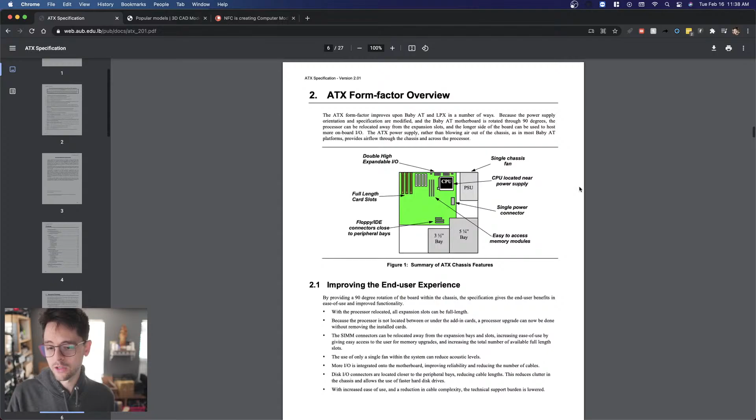If you're wondering how you position parts or make a particular part, there could be a standard for it, so just do a quick Google. I just did a quick Google for this one. I knew it existed before, but there are lots of different standards.

Intel, for example, has tons and tons of standards. They have the ThinMini ITX standard, and they'll have great documentation on how you're supposed to design parts, components, and cases for their ThinMini ITX. Same for their NUC—they have tons of great documentation and drawings. They even have 3D models of the NUC boards and components to help system integrators. So just keep that in mind.

A lot of engineers, a lot of companies supply you with the tools that you need to make stuff because they want you to buy stuff and make stuff and sell their product.

Here is GrabCAD. It's one of many different kinds of file repositories where people just kind of doodle and upload their files. They have a lot of computer parts on this site that you can download and use. However, I can't stress enough that you should never, ever rely on these models if you're going to go get your stuff made, particularly in a manufacturing scenario, because a lot of the models are wrong. The holes won't line up correctly, and you'll end up wasting a ton of money on a prototype. But it's great for just getting the rough dimensions of parts out there.

And getting started. Oops, 120—that's not going to work.

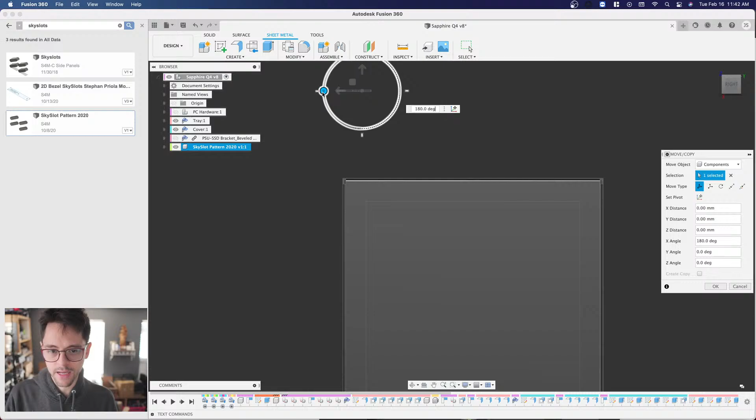I actually want my SkySlots going forward to the front of the case, so I'm going to rotate this around. SkySlots is just the trademarked name. They are trademarked of the vent pattern that NFC has developed.

With a lot of resources going into them, but they are extremely cost efficient to laser cut, which is very important because if you add a lot of different little cuts for vents and stuff, it can really add up - your cost of the case will explode. Secondly, it's an extremely strong pattern. Once you get the cutouts, you can have a lot of area for flow, but your panel's not going to warp or bend. And finally, it has excellent EMI capabilities for containing EMI, given the huge cutouts.

So depending on what hardware you're running, it may not be enough for you, but we were able to use it to pass FCC testing on several cases using SkySlots. And finally, they are VESA compatible when spread out in an array. So those are all the features of SkySlots, and of course you can use them for your own projects, for your personal use, absolutely for free. Or if you're an engineer at your company and you just need something made for your company, inside your company, that's also totally free. Alright, this is about where I want it to look.

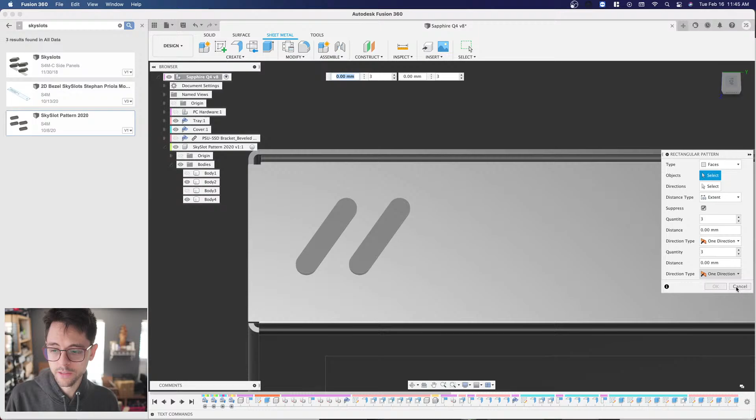Before I do that, actually, I'm going to make this easier on myself. Instead of doing a projection, I'm going to see how thick these are - 2 millimeters. I'm going to make these 2 more millimeters.

I've selected 2 bodies from my rectangular pattern. I got to click my direction, which is right here. And now I'm going to just pull it all the way across until it looks about right where I want it. I'm going to kind of match the top and the bottom, and move them all a little bit when I'm done. I think this looks fine, so I'm going to say that's fine.

But what I want to do is have the pattern match the spacing of the SkySlots, because that matters, right? Especially if I'm claiming that's VESA compatible, it has to keep that same pattern. So what I'm going to do here is just start typing in numbers till I get close.

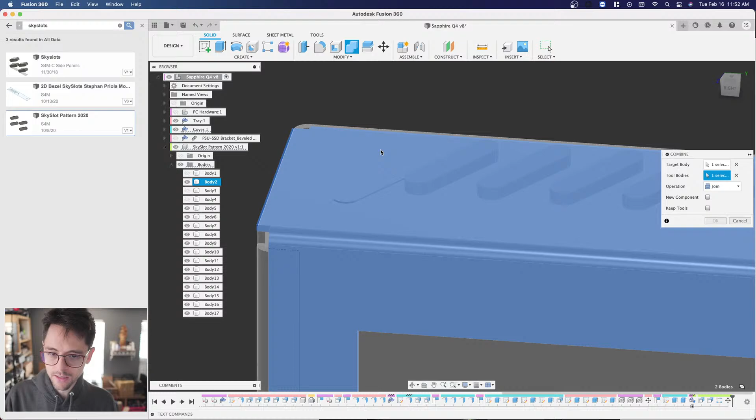Click modify, hit combine. I'm going to select the target body, which is my panel, and select the tool body, which is my SkySlot, and click cut. I'm using that tool body to cut into my case. This is really, really useful for making complex cuts, like if you have a sphere and a cube, you can maneuver the sphere on the edges and then subtract that sphere from the cube.

Really powerful tool. But I'm actually not going to do it this way because I want to cut through both sides evenly. So I'm going to hit cancel, go back a couple steps right here, and I'm actually going to press-pull intersect through my entire case. I think that's going to be the best method of doing this. So I'm going to hide this really quickly so I can select them.

It's so weird how Fusion operates as well, because this is a fine number, but if you have a lot of surfaces or faces that you're selecting, it can start to really bog down, and each selection takes like 30 seconds to update to the next one. It's horrible sometimes. Hit Q, which is my press pull.

I'm going to go back to my cover and unhide it, and now I'm going to just pull all the way through. And I'm going to click Modify Existing Feature. And it unselected it for me, which is not what I wanted it to do.

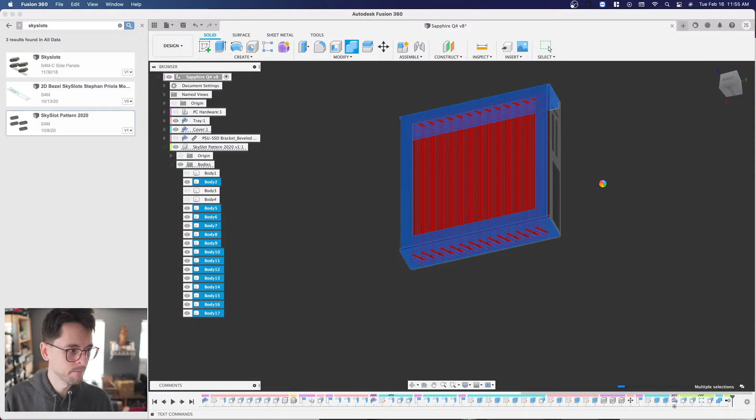Matthew asked a great question, and he asked why I use bodies rather than a sketch for cutout features. When I'm designing a computer case for production, generally it's better to do things all in the sketch, because the manufacturers aren't really going to look at the 3D so much as they are going to look at the 2D CAD, and that's kind of easier to share and go back and make changes to. However, I find that process to be very tedious and very slow, and for quickly designing a computer case, I think this process works totally fine.

There are some things that I do sketches for, which I'm probably going to end up doing later in this video, but I just wanted to use it the bodies way.

Also, I want to add that Fusion is really slow when it comes to working with sketches, because Fusion wants to keep in memory, I guess - I don't really know, I'm not going to act like I know - but Fusion is constantly recognizing the fact that you have something in a sketch and it's pulling from that sketch, so it works really, really slow. Whereas if you do it with bodies, it's like you cut out the body and then it's fine, there's a 3D model sitting in front of me, so the performance is actually pretty good.

Now, that's not really a good reason if you're designing a case professionally, but for my purposes here, I'd prefer the extra performance for these simple operations. Eric, NFC Eric, who is the CAD master, he only makes things in sketches, one part at a time. But you can't teach an old dog new tricks, so here we are.

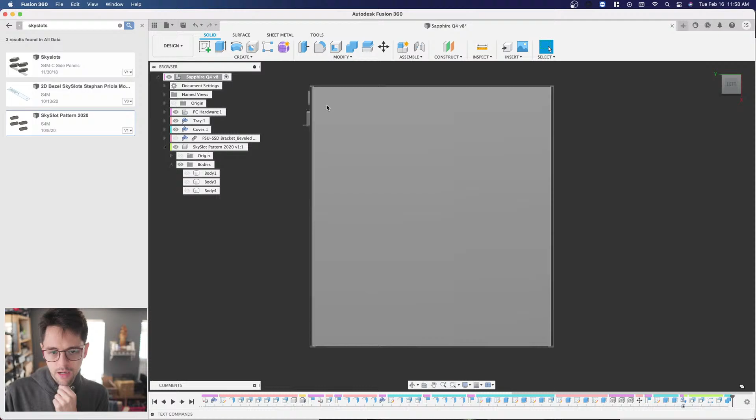I could put an array of sky slots to see the fans in the back, and that could actually look pretty cool. It may be what I want to do, or maybe I want to make a full-fledged window and do some kind of border around it. Maybe like cut out of MDF or something, and a spacer that pushes it more towards the graphics card, so it kind of looks thicker and beefier. Let's try that first. I don't know if that's what I want to do.

So what I'm going to do now, and this is also probably bad practice, but this is just how I do it - so if you're an expert, feel free to ignore - but at this point I'm going to duplicate my cover and my tray. And I'm going to start experimenting now. I don't want to mess up the old one.

I can always go back on the old one, but I find it's better to duplicate it and just delete it if I absolutely hate it. Or if I kind of liked it and wanted to see what it looked like versus the old one, then I can just hide it.

One more thing too, in case we missed this in the previous stream, my process for designing a case is I have this messy table approach where I put everything into my document to start with. I experiment, I move stuff around, and Fusion's going to get really bogged down because that's not how Fusion wants to operate. But once I have everything how I want it, I'll start exporting the pieces one at a time into separate folders, then I'll do an assembly file and use joints to put everything together, and I'll have a very high performance 3D model that I know aligns properly. But this is kind of my messy sketch table.

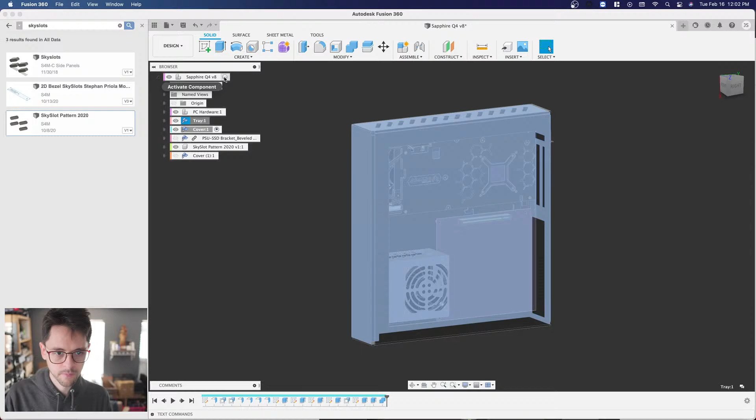So I'm going to hide my original tray and cover, and now I just have my new tray and cover. Hide the cover. I'm going to reduce the opacity of my tray. And I'm going to make a cutout on my back.

I'm going to use a sketch for this, because I think this is faster than using a new body. I don't want to go over the entire graphics card, because then when you're standing over it, to the side, or underneath it, there'll be a gap in the case, and that will look bad. So I'm actually going to make it less wide than I think it needs to be, so when you're standing over it, below it, or beside it, you actually see the whole card, or most of the whole card. It'll look cooler this way.

So I'm going to make this... actually, I have an idea. I'm going to use the cover as a guide for back to front. And I'll just make it shorter. I think that's right there, right? Yeah.

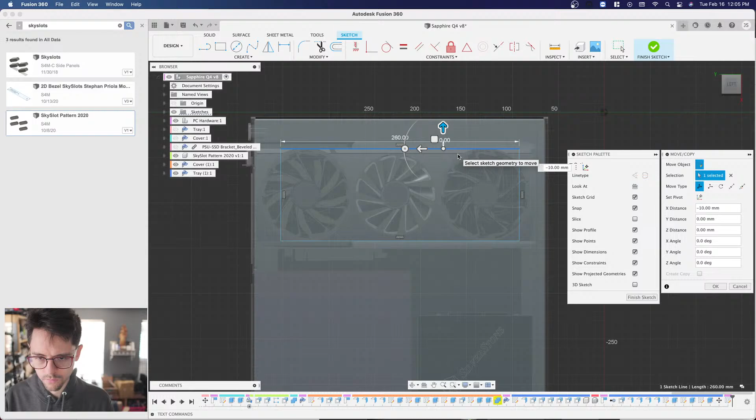Now that I have this in place, I'm trying to think if I like it or not. Of course, I'd round the edges. I'm going to put a window over it. But I feel like if I go expose the card more on this side, then I'll get less case, which I don't know if I really want to do. So I don't really know if I like that so much.

So I might end up using SkySlots and go with the Sapphire RGB fans that plug into this graphics card and do some LED lighting to illuminate the card from that side. I could put some circular cutouts for the fans and then use spacers. I could try that too. That could also look pretty okay. Could also look really weird.

Let's see what that looks like. I have to confirm on my graphics card that the fan hub centers are going to be the same, which I think that they are. It's going to be 60 millimeters for the first fan hub.

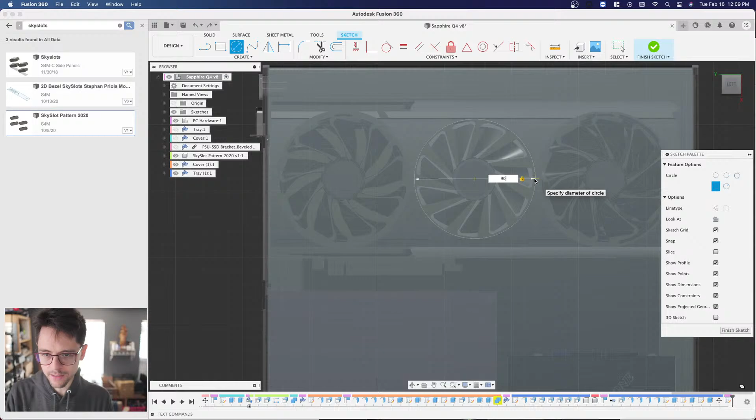Yeah, I think I'll go a little bit over in that case. I'll do 88 for this one, maybe 80, maybe 90. That doesn't give me a lot of room for the other one. I'll go 88.

95. I want to move this one so it's in the same plane. I want to move a copy. Hit create copy.

This is going to show a lot of case and not a lot of card now. It's kind of the catch-22.

But it could look pretty cool though if we do get the Sapphire RGB fans.

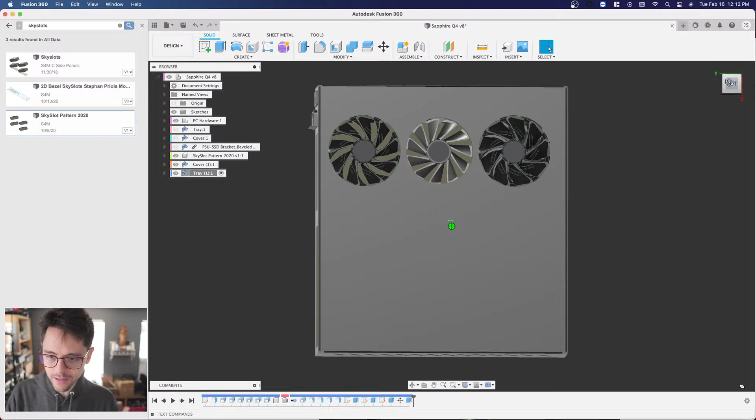Now with it full opacity, I see that the case is kind of a little front heavy now because the card has to sit this far back. Do I hate it? A little bit. I think I can get away with bringing the front in a little bit more.

So I'm going to kind of cheat and do this because I think I can get the card installed because of the really cool 3D printable bracket that's going to hold the card in, which you can see in the previous video. So I think I have room to play with here.

So I'm going to come down here. It looks like I have about 10 millimeters to safely get the card in. So let's see what that looks like. Again, I have the tray selected, which is what I want. Hit move. And I'm going to come back in 10 millimeters.

Which I can fit, but boy, is that tight. That means I'll have to install the card by this view right here, sliding it in that way. That'll be kind of difficult to do, so I don't want to go that far. So I'm just going to go 5 millimeters. Oops, that's 15.

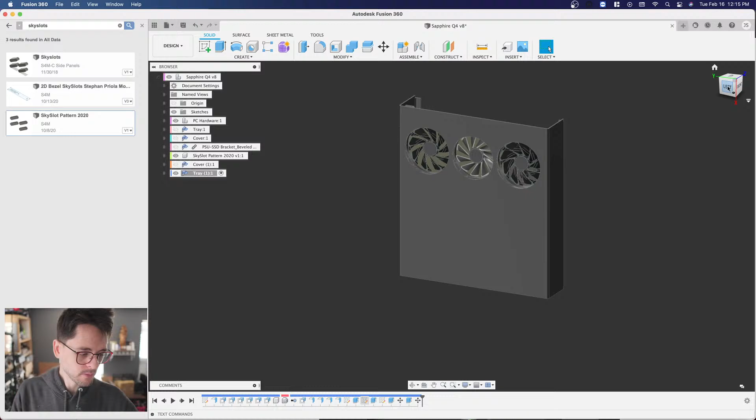Jesse, you're more than welcome. I'm sorry that my process and my thinking is so slow and unprofessional, but I figured I might as well show it anyway, so maybe it can help somebody. Because if I can do it, anybody can do it, and that is the truth.

I don't know, what do you guys think? Do you think that the cutouts of the fan are going to work? We put some trim over it. It's just a little bit too gamery.

I do want it to be a little bit gamery because this is a case for Sapphire to show off their stuff, it's going to be a custom mod for them. So it can be a little bit less tasteful, I guess is the term. Usually when you're making a case for everybody, you want to tone everything down and make it minimalistic so it appeals to everybody, but it can be a little bit wild and crazy for this. I just don't want it to be ugly.

Okay, for the motherboard, do I want to make any more cutouts? Make some SkySlots for everything? I think I could. I think I should add at least the mounting points for the motherboard though, maybe the power supply, so I know that if I'm making SkySlots, it's going to look okay.

But then again, maybe what I'll do instead is a cutout of the Nitro guy, really big. I could do a decal of the Nitro guy, that would kind of look neat. Or maybe I could do a cutout and then put a piece of acrylic behind it, as long as it's going to look good from the top, because that is a consideration that I want to make.

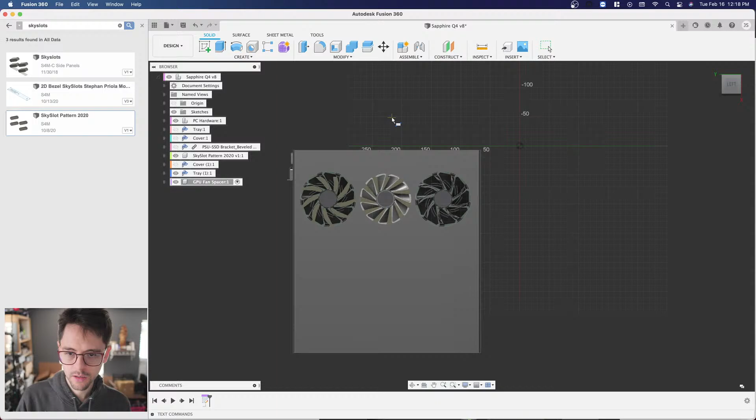And I'm going to create just a box. If I click the planar face, it's probably going to want to merge with it, so I'm not going to do that. I'm going to click outside of my model and just move it. All right, I've clicked outside my model, now I think I can place it inside right here, so here to there. I think that's correct. Yep, cool.

So we can just start adjusting my box. I want to go this way, I want to mate up, 10 millimeter, that's about right. We want to make sure that it covers my fans in the front. This is on the bottom flange, so we have no problem going all the way to that edge. Now I want to make sure that it's somewhat centered on the graphics card.

I actually kind of like it a little bit below. We'll come up just above it because this is 110. Let's make it 115.

Okay, now I don't usually do appearances this early on, but instead of changing the opacity, I know I want to make it out of acrylic. So I'm going to go down to plastic, and down to transparent, and... that's kind of cool. I do have orange, but I'm not going to use orange. I'm going to probably use a blue or something, maybe a dark gray, something that kind of catches.

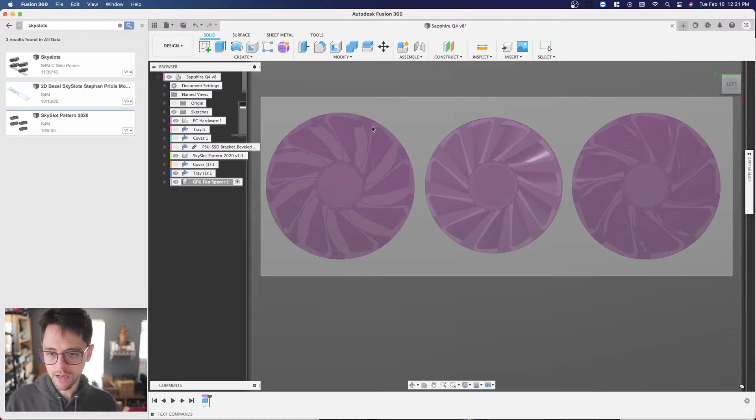Okay, I can do a couple things here. I can leave a slight ring, but I'm already up against my upper parameters with the sheet metal, so I don't think I'll do that. Maybe it's the slightest possible ring, so it will catch the lighting. Maybe I'll do a chamfer operation with the CNC instead of laser cutting this out. Let's try that, I think that will look kind of cool.

So I'm going to use a hole feature this time instead of a sketch. The reason is I can click my acrylic part anywhere I want to, as long as it's the part I'm cutting into. I'm going to choose simple hole, right here, so we don't have to specify any bolts or anything like that. We're not drilling into it like a drill, it's just going to be flat - we're making a standard flat hole. And we know first of all we want to center it. This is what's cool about the hole feature - we can click any circle reference that we want. Boom, and the hole now centers this cut that we're making.

Really easy, really simple. It's so funny guys, I used Fusion for like 2 years before I discovered the hole feature. I was making sketches with holes and then going and extruding them all by hand. I didn't know you could use the hole feature, which is absolutely epic. You can choose what screw sizes you want too - I'll show you more later, that's going to be important. Really, really awesome tool. So the diameter, we know this is going to be just 10 millimeters thick, 10 millimeters deep rather, the cut.

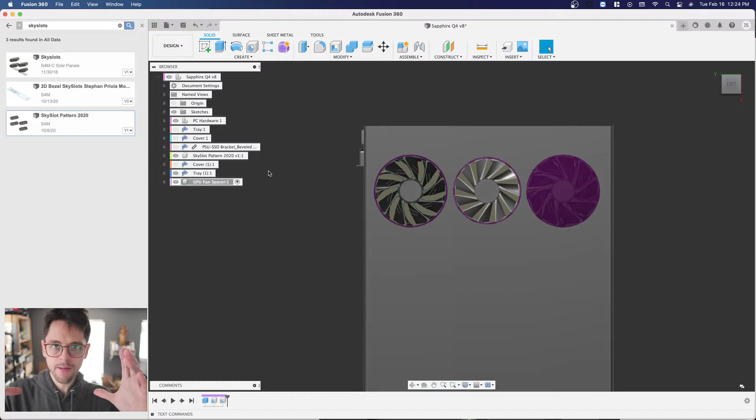Now, something to know about fans, which I'm sure you guys already know, most of the power of a fan, as far as how much air it can push, the pressure, is at the very edges of the blades. So we want to cover that just a little bit, but we still want to leave the edges of the blades open to the air. Let me see if I can rephrase this - all the power of this fan is going to be in the edges, pushing down to the GPU's fins. So the air is going to get sucked in towards the middle, but slung out down towards the edge of the fan. If this was reversed on the other side, this would be a horrible design, because this little ring that we have here would be blocking most of the fan's ability to generate pressure. But since we're sucking in air past it, and it's going to be pushed down into the fins, this would be okay. I'm really sorry that I'm a bad teacher, and even worse at explaining things, but hopefully that makes a little bit of sense.

Sorry, I got my... oh, that's the depth. I definitely don't want that.

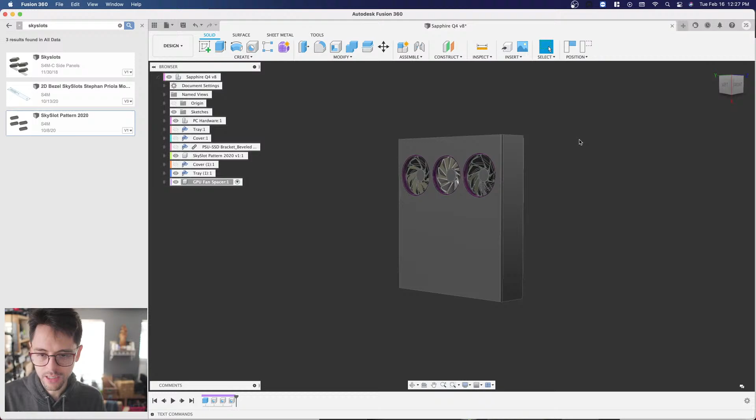Now you can see that we have the outline, and that's because in every 3D application I've ever used, if you have two 3D models touching each other exactly, it will cause weird rendering errors. So the solution is simply to move it out a teeny tiny little bit. We're actually going to make this 0.5. So our rendering error is gone, and more importantly, when we actually go to render this, it's not going to make a weird flickering error.

All right, going back to design. Blake asks, how do I like Fusion?

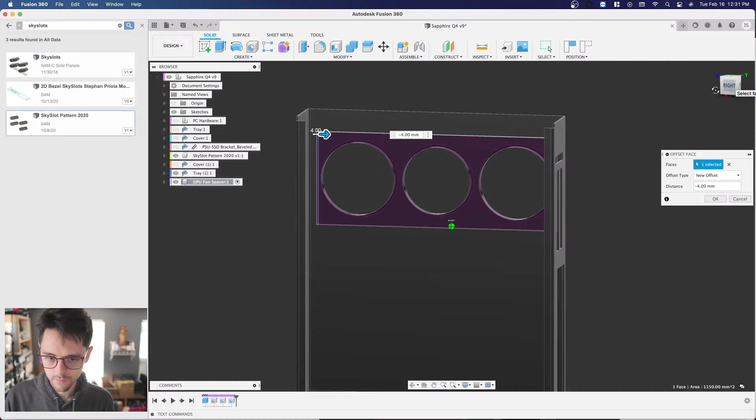It's about right. The only thing is if I look at it from this angle, I do want it a little bit deeper. As long as it's about 4 millimeters though, I'm going to be happy with it. Oops, sorry, I just bumped the microphone with my hair.

T's asking how I add a model to a project - I'm sure I'll be doing that quite soon. I've done it many times so far, and I don't think I'm over with that. Kenneth asks if this will be recorded later. Yeah, it will be, it's recording right now I think, but it's definitely going to be saved on YouTube. Hopefully somebody will also come back and volunteer to chop this down to size.

Protato has pretty good facts right there - you can cut aluminum with a laser. In fact, SendCutSend has fiber lasers, and I will be cutting this out of aluminum with a fiber laser. But my laser, my metal cutting laser, I can't cut aluminum - I can only cut steel.

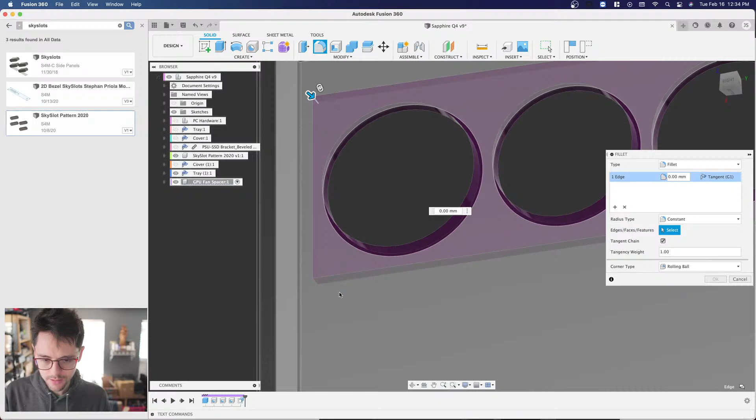Now, something I see people do all the time when they're designing computer cases — and this includes professional computer cases like from Thermaltake or Silverstone or whatever, and a lot of Chinese cases — is that they don't stick with a look for their fillets. They just use different sizes everywhere. You can have them different sizes as long as they look similar, but you want to keep it looking similar throughout the case. You want your case to have a certain aesthetic, and it looks bad if some of your fillets look like this and some look like that.

I want a little bit smoother, rounder for the look of this computer case. Not too much, I'm going to keep this at 15. I'm going to try to keep this look for any rounded parts I do throughout the case.

If you want to know what bugs me — when I look at a computer case and I see different kinds of ventilation cutouts, that's ugly to me, that's really ugly to me. Or I see them using different kinds of bins throughout the case, that's ugly to me too.

Now I'm going to chamfer these. I've decided I'm going to do this on the CNC, plus the CNC will give a much better edge than the laser — it will make a nice smooth edge that I can polish out really well. We're going to drag it a little bit. Oh, I don't want to fillet it, I actually want an actual real life chamfer. Two millimeters. I think that is going to look really slick on the CNC.

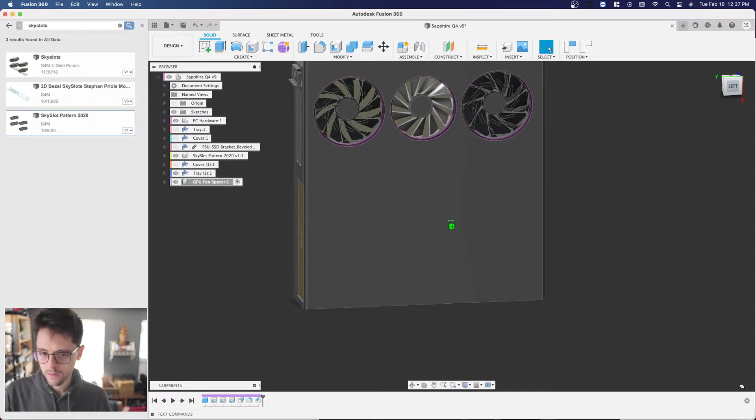The question is, how will I know where to put those particular holes? I could, on the CNC, if I was going to make this on CNC, mark those holes really easily so I'd know exactly where to place my motherboard. I think in this particular instance it's going to be better looking and better served if I do some kind of trim plate on this side, either out of carbon fiber or an opaque acrylic, maybe a piece of aluminum. That way I can just cover up my holes.

It adds the cost of the computer case, but I'm not worried about that because it's a mod. So let's put my holes in right now either way for the motherboard, and then I can worry about covering them up or deleting them later if I go a different route.

So to make those holes for the motherboard, I'm going to press H for my hole button, capture the position, click my tray. Definitely don't want that this big. Because I'm actually doing this for a screw, I'm going to click clearance.

And because I'm going to make it countersunk, I'm definitely going to click the countersunk button as well. Well, actually, I'm going to show you countersunk, but I'm not going to do it for making this computer case, and I'll tell you why in a second. And then for the drill point, we want it flat. The depth, obviously we want the thickness of the material, which is 2.

And we're going to choose an M3 screw. And now Fusion knows exactly what the diameter of this screw hole needs to be for an M3 screw, a clearance M3 screw.

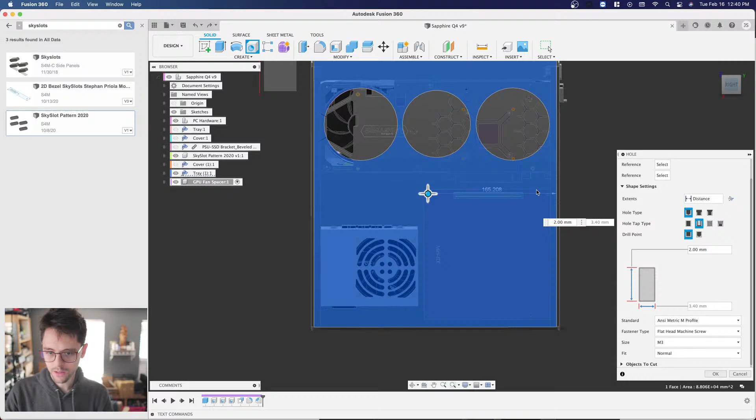All right, now I have my hole, and this is why I love the hole feature so much in Fusion. I don't have to drag it or position it or move it around. All I have to do is click where I want it to be centered, and Fusion automatically will put it centered on the hole that I clicked. Boom, so now I have a motherboard hole exactly where it needs to be.

And I'm going to do the same thing a couple more times. Something else that's kind of cool, if you do a sketch with all your holes in it, you can click the hole tool, and then click one button on the hole tool referencing your sketch, and it will automatically put holes in every similar sized sketch object, if that makes sense. Very handy. You don't have to click every single hole on your sketch, you just have to click one.

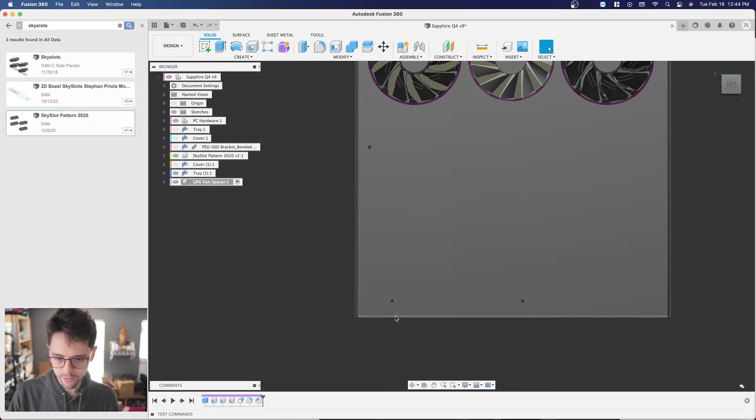But I have a problem, and that's I can't really make a cover to cover these two bottom motherboard screws up, because that's going to cover where my other screws are going to bolt. It will look kind of weird, I think. So I think the way to tackle this will be with a pattern of some kind, maybe SkySlots, to make my brain feel like those holes really aren't there.

I don't want to put SkySlots behind the power supply though, that would be dumb. And I don't want to put them... I could put them behind the motherboard right here. Give us kind of access to the back in case we wanted to put like another SSD there later or something.

I think I have to add my screw holes to my clamshell design now in order to get the look I'm going for. I usually like to wait as long as possible before adding holes, but I'm going to have to do that. And the reason I like to wait is I don't know how I want this to look yet, right? And I might end up scrapping this look for another.

I don't have to go through all the work of adding the holes all over again. But it's important at this point, at least, to do these ones so I can see how it's going to go together. So let's do that.

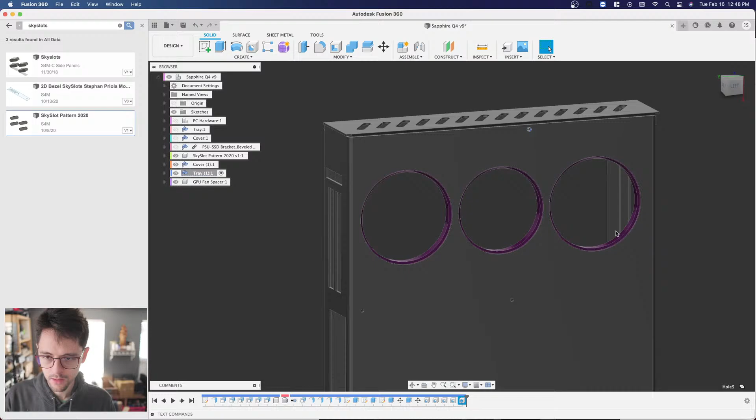155. So now it's mostly centered. 5 and 155.

All right, to the other ones. And we'll say 20. What's 20 look like? And here is 5. That's good. I don't want it totally on the edge. I'm fine with that look. And it's going to hold fine right there, so functional and cosmetic.

I must have selected the wrong part.

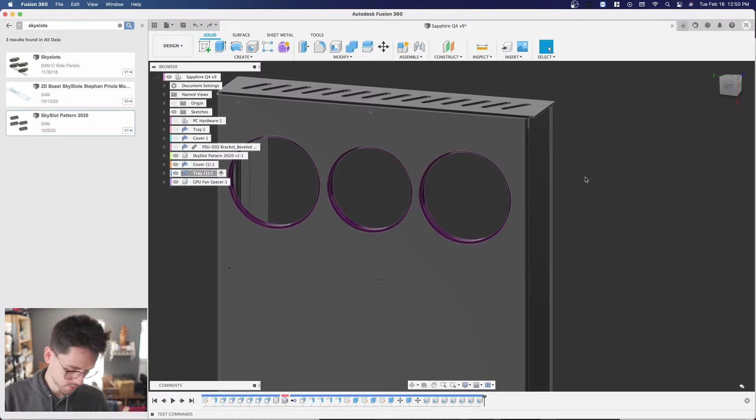I don't know why it's doing that. It's not even giving me an error. Can I do it anywhere else? Very strange.

And we definitely do want to know exactly where it is, so I can't just freehand it because we have to make mating holes.

Might have to restart Fusion. Okay, I don't know why it decided it wanted to start working, but I'm fine with that. And I'm going to do the bottom now.

So now I can see where my holes are going to be. And again, I'm not happy with the fact that we have the motherboard holes. The other ones are fine, but the motherboard holes just look kind of bad. So, is it a big deal? The biggest deal in the world? No, but we can do a little bit better.

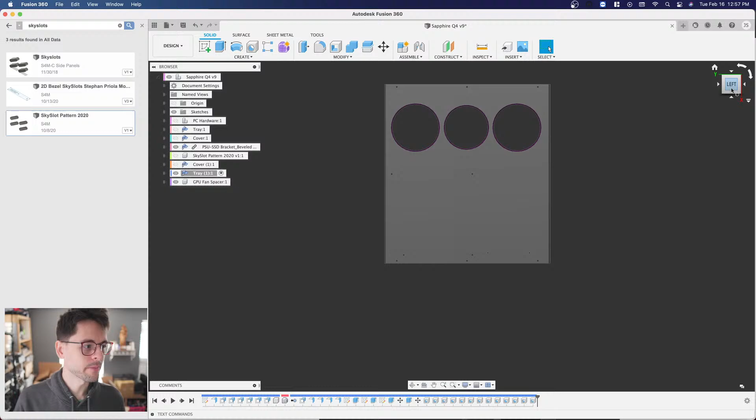Nazim, this is a computer case that I'm making, a Mini ITX computer case, and I'm showing people my process of start to finish, making it and getting it made.

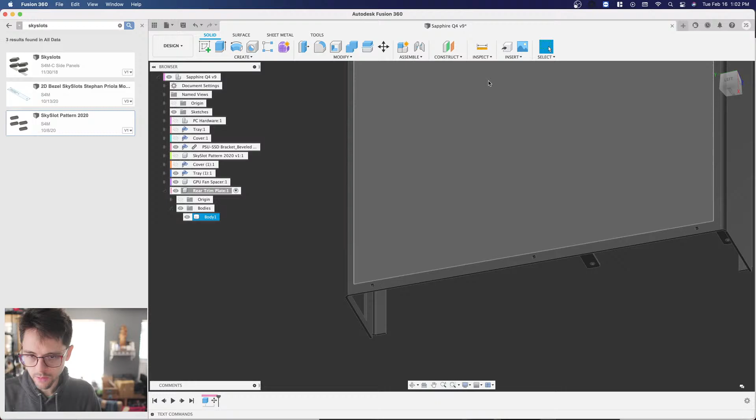I'm actually going to center this using good old-fashioned measuring tools. That's 8.7, 8.8. 9.5. So 0.35, I gotta move this. That's basically nothing, but I'll do it anyway.

Now I'm going to do these little trim cuts to go around the M4 washers, but first I got to make sure those M4 washers are going to fit on there. So I'm actually going to make a new component and call it hardware for modeling the screws later. Think of a component kind of like a folder, kind of - well, it's not really like that at all, but you can use them. I use them like that. We'll call this hardware, or fasteners rather.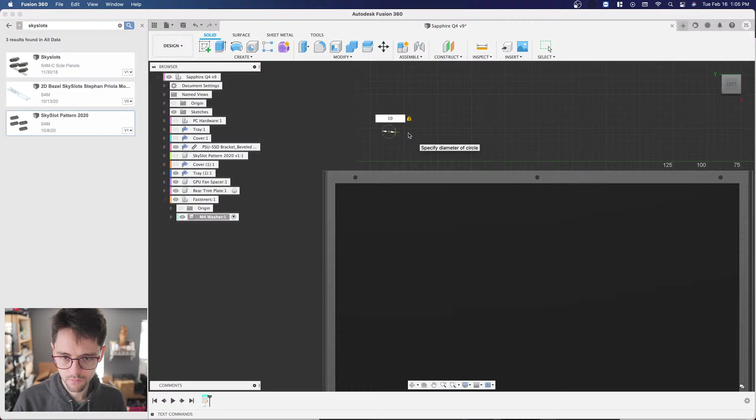These are 10 millimeters. And they are 2.3 millimeters thick.

They have a hole in them for an M4 screw, 4.3. We can actually come down here and select M4, which they have a 4.5, so we're not going to use that. We're actually going to use the actual washer, make it as accurate as possible. So we're just going to click simple, and we're going to say 4.3 because that's what our actual washer is. And I'm also going to make it countersunk.

Oops, I should probably modify that a little bit. And that's about right, that's how it looks in real life. And we're going to throw on an appearance. Get them in black. Now I have my M4 washer.

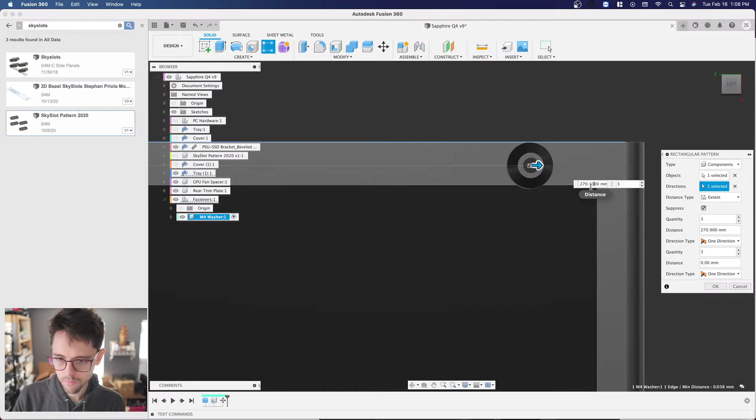It's usually pretty smart about seeing a hole or something like that and extending to it. Obviously we're kind of off here a little tiny bit. So let's see if we can... No, 9.5. And this hole's off because I put it in the center from the back instead of from the side as well.

But I think I can move this inside the pattern. And I'm going to move this down. And we only want 2.

If you select an item in Fusion, see how it little underlines it with a little squiggly line? I just learned that recently. So yeah, I know I want to select this washer. And this one is this one.

Again, you'd want to use joints for this, but what I'm doing now is I'm using a rough draft model. I'm throwing everything in there, throwing all my ideas out here. I'm making changes, I'm deleting things, I'm going to be deleting things. So I make a rough draft, really nasty, slow model, and then what I like of it, I'll export into a folder as individual parts or components, and then I'll make an assembly file and use joints to put everything together at the end.

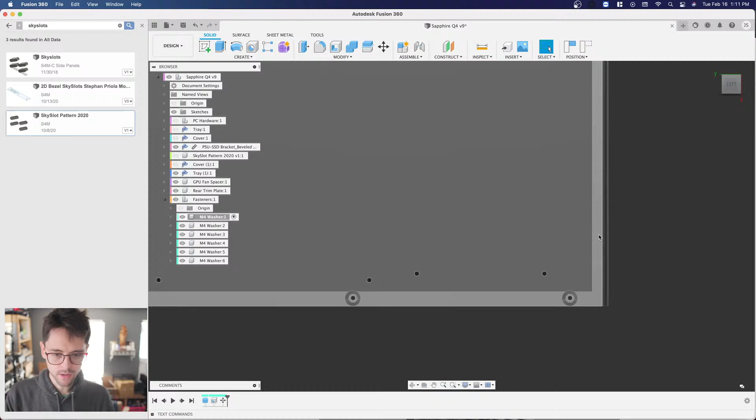Now as you can see, my trim cover plate is intersecting with the M4 washers I just made, but I can't make my trim plate much smaller because the motherboard screw holes are getting really close, and I want to cover those up. So what I'm going to do instead, which I think will look interesting, is...

I'll just show you what I'm going to do. I'm going to make a new component, a new body, and delete it when I'm done. I'll do it under the trim plate. Create a cylinder, capture the position, put it outside my model, and see if I can find a reference hole to start. I might just have to align it later, but I'm going to try to do the first one somewhat in the center here.

I'm going to do this, and I want it to be at least 1 millimeter to cut through. That's fine with me. And I'm going to move this body that I just made.

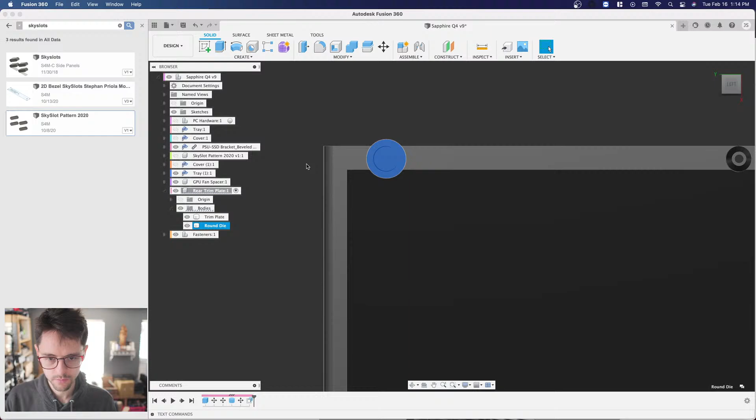And I'm going to make copies, instead of a pattern, and put them over the other holes so they're exactly over those other holes. Because they're round, I can select the edges, which is really nice.

Now I'm going to use them as dies to combine through my trim plate, and then they'll just disappear and I don't have to worry about them again. Hit combine, hit my target body, hit my tool bodies. That's the wrong body. I don't want to keep my tools, I want them to go away forever when I'm done.

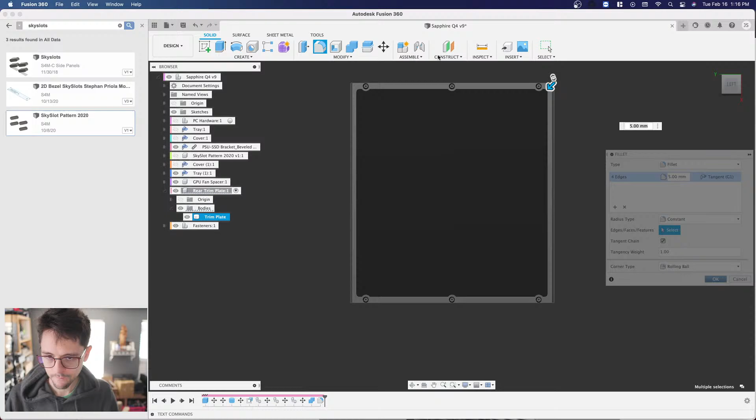Five looks about right. And then I'm going to do all these cups, the edges on these cups, of which there are 12, to zoom in and out of.

I'm concerned about the outside edge one, because I want to align it with the other one I just did. I don't think I can make it 5 millimeters, but I'm going to see if I can. I think that looks fine, so I'm going to keep it there.

So now I have a trim plate that is covering all the nasty holes for mounting my motherboard and power supply and anything else I want to mount on the inside. But of course, I have to put some extra holes in here for the fans that we have. And this will be quite easy.

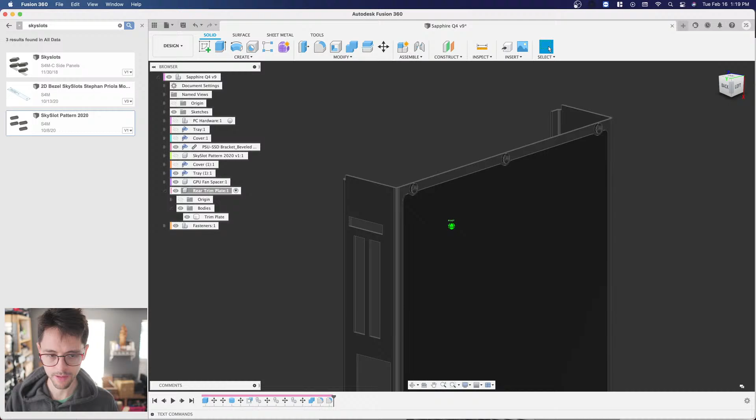I must have selected the wrong thing because absolutely nothing happened. Rear trim plate is selected. I had a problem like this before, so let's...

Oh well, we definitely want it to be simple, don't we? We definitely want this to be 1 millimeter.

Okay, now we'll re-show our GPU fan spacer. That kind of looks good. I know it's going to have the other material, aluminum, showing, and I could leave a little rim, but we're getting awfully close to the edge of this material, so I think I'm just going to leave it like we're doing here.

And this is going to be... 85? No? 86? 87, okay.

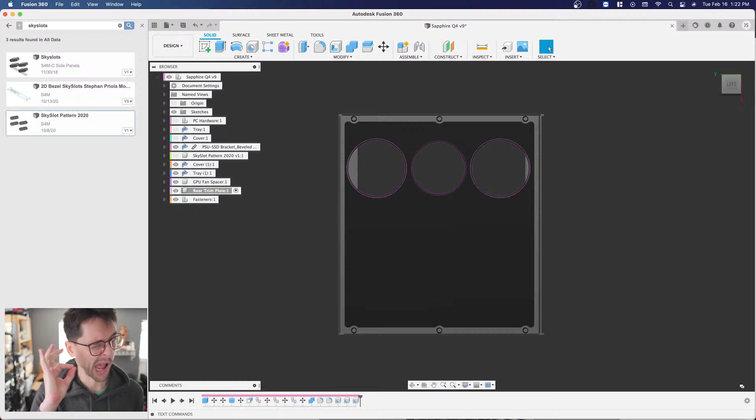Okay, how can we make this more unique? I think putting the Sapphire Nitro Guy logo right here is kind of my next course of action. I think that will look good. Of course, if I do that, I can't get this part made out of carbon fiber. It'll have to be some thin aluminum or something. I'll just have to paint it, which won't be bad.

The Nitro Guy has really sharp interior angles, which can't be done on a CNC easily. I'm not going to do it on a CNC, and carbon fiber can't be cut on the laser. So, you know, catch-22 here.

So let's see what the Nitro Guy looks like. I might have it from my previous build. And if not, we're going to show you how to use decals.

Ryan asks, how do I deal with dust in the design? Is it just filters or the path of air and pressure tricks? For my case, it's not filters, because filters aren't necessary -- well, I don't like filters in general for a consumer PC case. With filters you have to have a wind tunnel design of air getting sucked in by the fans and being ejected out. So you put filters on the highest pressure point of the case where the fans are, and then dust gets trapped there in theory, with clean air exiting out the back. But in the Skyreach 4 Mini, it's not how it works. You don't have intake fans, just the fans on the graphics card and the CPU, and they're not intake fans.

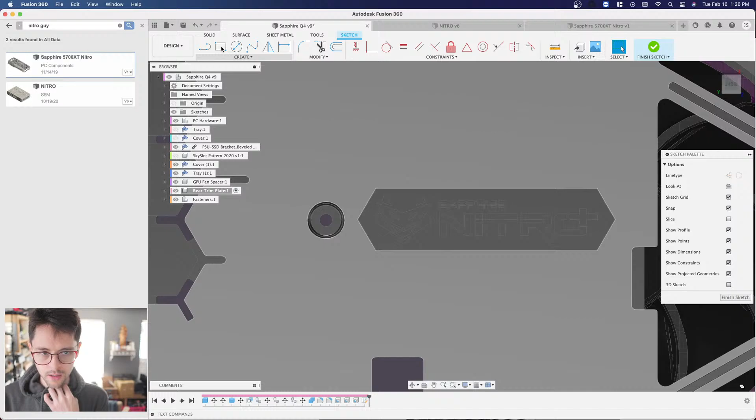So I'm going to create a sketch and then see if I can move that sketch and extrude from it. Let's create a new sketch -- where do I want it? Rear trim plate, that's fine. I don't know what I'm doing right here, so bear with me, figuring it out as I go along. I want to project on this. See it projected right here? And then I want to move this.

If I can move this, I don't know if I can. Let's finish it and then see if I can move it. Oops. I don't think I can move a projected sketch, which kind of sucks.

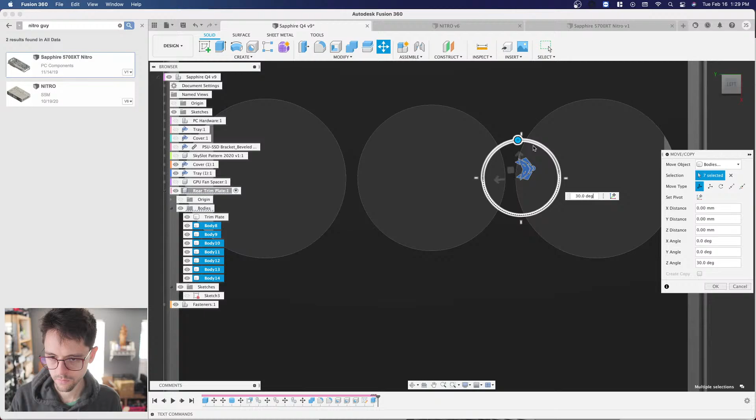There we have the tiny little Nitro guy. Obviously we need to make it bigger, so let's do that. I don't know how big it really needs to be. What do you guys think?

Hey Ryan, there's a couple cases like that already, specifically made by my buddies at HDplex. Check them out, I think they make the world's best fanless cases, at least for small form factor. There's some other companies that make giant fanless cases. The Mini is designed to dissipate heat from the power supply, transfer it to the front bezel, but the newest HDplexes run so cool that it's not really needed anymore, though it still dissipates heat. If you ever hold a Mini, you'll know that it does dissipate heat.

Smaller than bigger, I kind of agree, a little bit smaller. Maybe we... I don't think I can move it. Kind of want the same size as that middle fan hole. I don't want to put the Sapphire font underneath it, I just want the logo.

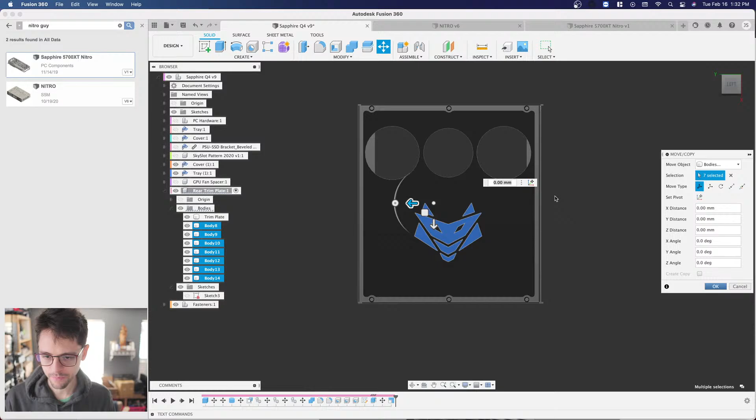It's tricky because remember the fan holes aren't actually centered in the case, they're where the fan needs to be. So do I center on the fan holes and have it a little bit weird in other parts of the case? I think the bigger it is, the less awkward that is, so I might end up making it a little bit bigger actually. Because the little chin doesn't line up with that bottom hole, but it lines up with that middle hole, so we kind of want to split the difference. I think I might make it a little bit bigger, even though I kind of like how small it looks, I want to trick the viewer.

I think that works a little bit better for my purposes. Now there's something we could do that'd be pretty cool. We can cut through this plate, revealing what's underneath. Or we could cut through this plate and actually laser cut these parts out of thicker acrylic and have them stick out a little bit. That would be nice, but the only problem is the eyes would be floating, so that would be very difficult to line up.

Instead, what I think I'm going to do is just cut through, either use the paint job, or I'll put some super reflective foil tape behind it so the logo will be silver when it's cut through. But either way, I'm not going to delete these bodies, I'm going to keep them around just in case I need to put the logo somewhere else on the case.

So I'm going to hide my cover, hide the tray, and I'm going to combine these. Target body, tool bodies, cut, cut, cut, cut, cut, cut, cut. And we want to keep the tools. So we'll have a problem again with this floating part. I'll have to remember to keep these little diamonds.

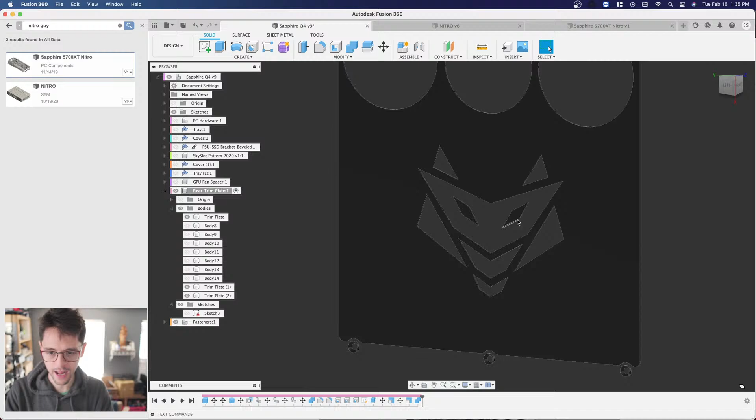We could just get a logo cut out of vinyl and stick it on top and not have it go through, but I think it's going to look cool like this. I'll make a note to see if the SendCutSend can collect these two pieces, otherwise I'll just remake them. No big deal, I could even make them out of a different color acrylic, like a mirror acrylic for the eyes. I think that would look kind of nice. I don't think Sapphire would complain about that. So let's see where we're at.

Where's our GPU fan spacer and our PC hardware? So the back side of the case looks pretty good. We've accomplished a lot. We have the fasteners there for bolting the panels together. We've covered up all the nasty holes for the motherboard and the power supply, and any brackets I want to hold the GPU in place.

It's looking good. Somebody asks, what happens if you use lasers on carbon fiber? Nothing. Carbon fiber is immune to every wavelength of laser cutter that I know of. You'll burn the epoxy, the resin that holds the carbon fiber together, but the laser hits that carbon weave and it's like, I don't know what to do with this, and it just makes a big mess and won't cut through. It's really weird how lasers work.

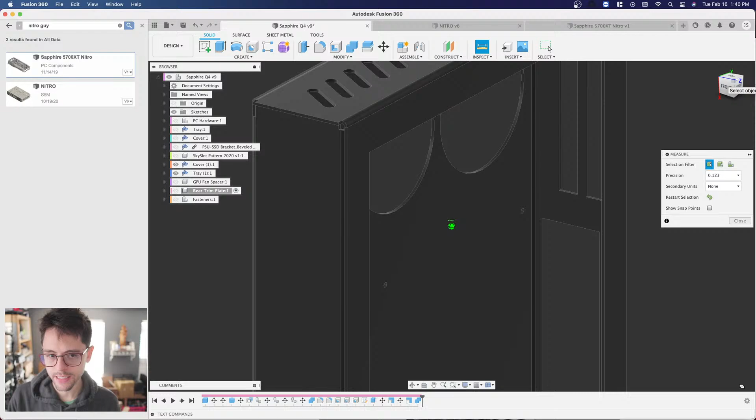Did I move it 10 millimeters back? Does anybody remember? Let's start selecting. Oops, that's the wrong thing entirely. Or was it 5 millimeters? It was 5. Thank you, Thanos, you were right. If there was a prize, you would win it. But there isn't a prize, so sad face.

All right, so this is the look I want if I was just going to use the metal front panel. But if I wanted to use a trim bezel, I'd actually want to make this more flush and cover it. But I like how smooth it looks from that side, so I might not end up doing that. So I'm going to work on the front last, I can come back and trim that up later.

The top, I don't know if there's really anything I want to do for the top, just want those vents there. The bottom I want to make a stand for. Maybe that's next on my agenda, or maybe that's last once I see how everything else looks. Let's work on the top. Now, before we do that, actually, I want to work on some kind of brace system for this graphics card. The back is very beefy, that's going to hold very well.

So I'm going to design a clamp, which should be quite easy as long as my bender can do an S shape. Let's see here. As long as it's long enough, I think my bender can do an S shape, especially how thin this is going to be as well. Okay, so let's make it. It's going to be a new component, a sheet metal component.

GPU bracket. I'm going to save this. I don't want to make it on that, I'm going to make it here.

I'm going to get the riser ribbon. I want to see how far this sticks up. This card is so thick and beefy that the riser actually sits flush with the back plate, which is cool. That means I can cover all this up very easily and still have it function as a nice anti-sag device. It's not really going to sag, it's going to flex.

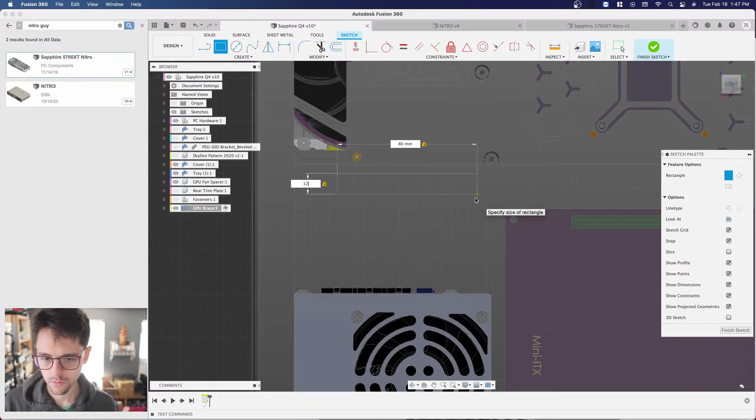So I'll just make an anti-sag bracket real simple by doing something like this. Make this 80 millimeters. This will be, doesn't need to be 15, we'll make it 12. And this is a sheet metal part, so we're gonna get the flange.

51. We'll say that it's 52 millimeters. And make the flange go this way. We want this on the outside. This is going to be thinner material than 1 millimeter acrylic, but I'm going to have to go back and adjust this a little bit. And we want this to be 12 millimeters. Yes.

Now this one we need to make taller. Actually, I'll make it 54 because we want to have some kind of padding clamping it down, some neoprene or something, clamping it against the other neoprene that we're going to use.

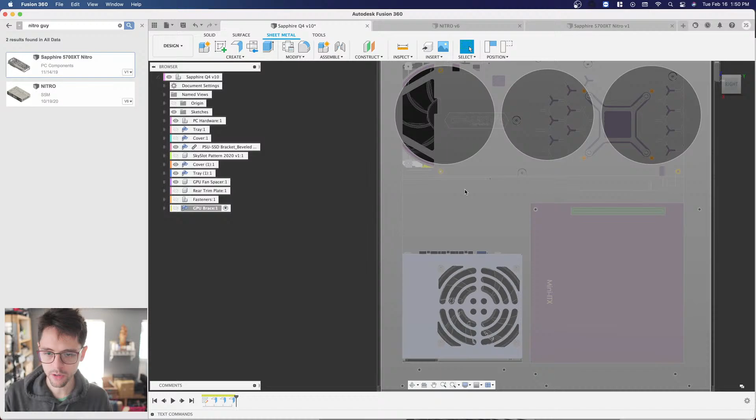Potato asks, is enough space for a 2.5-inch hard drive? Yes, actually the bracket for the power supply that I'm using right here supports that with this graphics card. So with this SFX power supply, you can put two, and I can make it as deep as you wanted to put as many drives as you wanted to, but remember there's cables on that power supply. But right now it will support two 2.5-inch hard drives, which are not going in this computer case. I'm gonna leave this bracket in just so you guys can use it, but when I get this part, I'm literally gonna saw it off so it's not there anymore. That's my plan for that.

If you're just building this case for yourself, you're not going to need this GPU bracket. It's going to be real stiff in there with the riser cable and everything. I'm just concerned about shipping this overseas, so that's why I'm making a decent clamp bracket.

I know for a fact that this part isn't strong enough to hold the graphics card from flopping up and down if I wanted to add another bend right here, which I could do. I could make it go all the way to the front of the case, I suppose. But I want this to be really bolted down good, so I'm not going to do it that way.

All right, it's where I want it to be, so let's hide pretty much everything else. Go to town on this guy.

The first thing I want to do is add some kind of vent here. Can I add SkySlots? That would be kind of dope. I could add the Nitro Guy logo. Let's do that, more of those the better, right? They look cool in the photographs for the build log. So I put that on the rear trim plate.

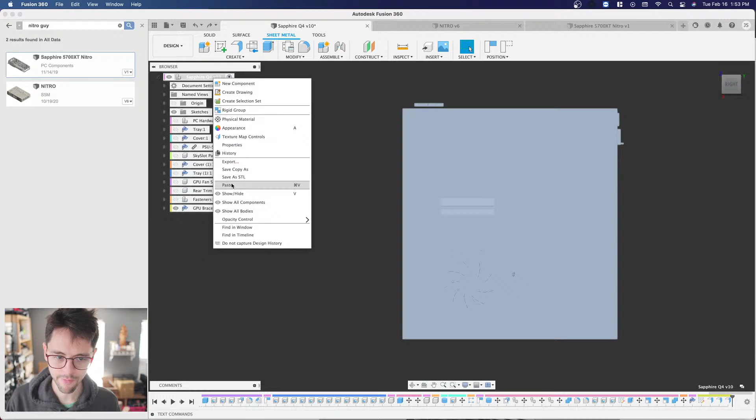And this should show up under bodies. Yep. So I click paste or paste new. I'm gonna hit cancel. Undo. I didn't have an option. I guess this is a body, not a component. It doesn't care, just create another dumb copy.

Well, maybe let me do minus 0.5. Cannot scale backwards? That's how you do it.

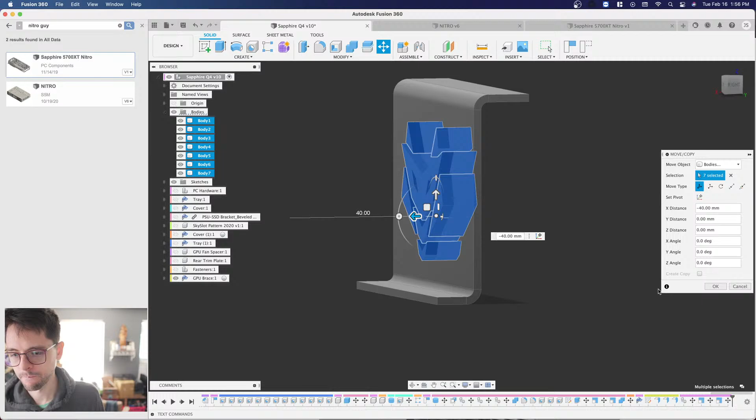Now, is this far enough away from my bends? It is. So now I can combine this - modify, combine, capture my position, target body, then my target components. And I'm actually going to select the eyes too. Well, I'll delete those later because I don't think the computer is going to know about these. Oops, what did I do wrong here? Oh wait, I know what I did wrong.

Now I'm going to test something out right now. I'm going to go to this brace, sheet metal, see if it errors out. Nope, it did a good job. It realized that it couldn't keep those floating parts. I'll talk more about that later when we get into it, but we're fine for right now.

I actually don't need to make it this thick. I might make it a little bit thinner. Solid. Go back over here.

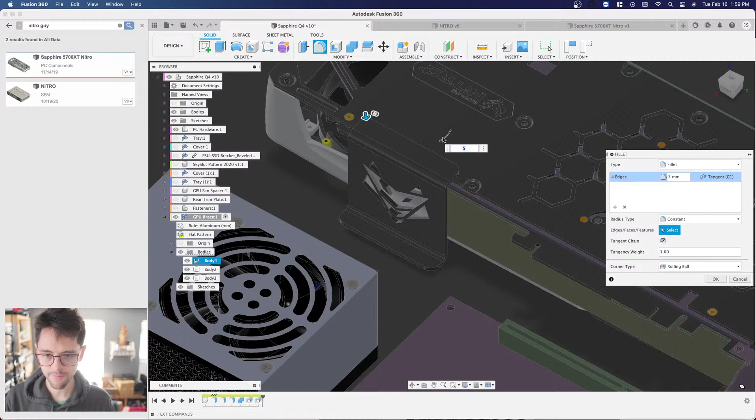Add some tasty fillets, a fillet of fillet. Five looks a little too round, although I've been using it throughout the case. Let's bump it down to 4 for right now. I'll go back when I do the fillets for the actual sheet metal and see what that looks like.

And we're going to need to add, of course, 2 holes. Capture my position. Thread tapped, full, flat, depth is 2. And this is a M3. Yep.

Now do you see how it nicely and neatly found that outside curve and centered it? I love that feature. So I select anywhere on my model, and I just click that outside curve, and boom, that hole snaps right to that outside edge. So I don't have to sit there and align it and try to figure out how it's going to match.

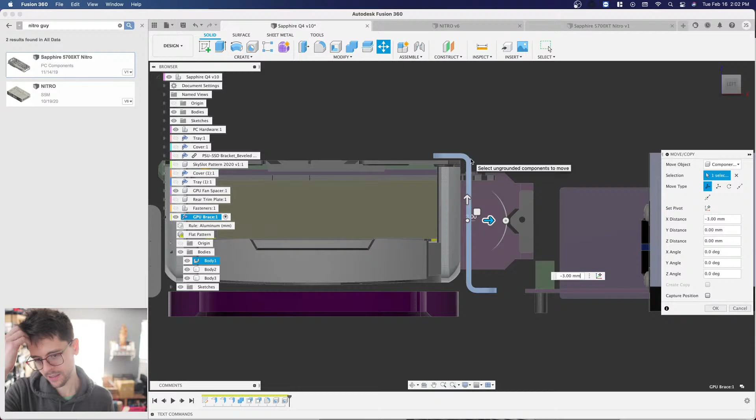Something to keep in mind when designing parts: always plan for tolerances, because it looks like there are huge gaps in the computer, but in real life they're almost non-existent. So I never want to butt a part up against a bend like this. It looks like we can fit it into that notch, that curve, but in real life it won't look like that. I want to make sure it's at least outside the start of that bend, and then it'll actually be pretty close in real life when we assemble it all.

Another added bonus is it's going to cover the nasty fan cables and RGB cables on that side.

I just noticed though that I didn't make this bracket tall enough. I don't know what I did wrong. It's odd, very odd. Eight millimeters - how did I mess that up? Besides being a dummy.

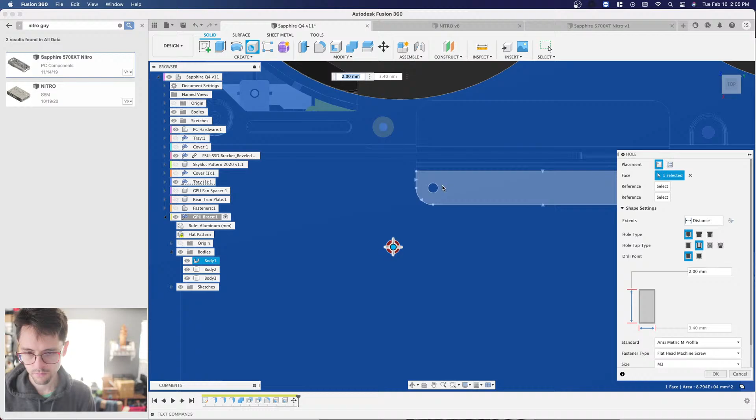Clearance for an M3. And we have our trim panel covering that up, of course. Let's see how we're doing here.

With our parts, let's see how we can clean some stuff up. Your back looks a lot better. We have a brace. Okay, the next thing I want to focus on - I don't want to show all this huge bundle of cables exiting the power supply area.

I don't want to show the riser ribbon either. So I'm going to make a trim panel, an interior trim panel, that's going to try to cover these up and still look tasteful somehow. I don't really know how I'm going to tackle it, but let's see what we can come up with.

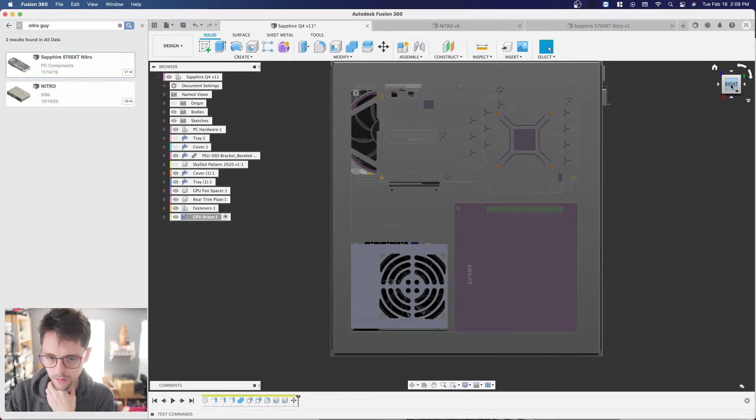Where is it going to attach to? The back, maybe? Keep the front clean. Of course, I could just make the entire side SkySlots, which looks really good in my opinion, but I kind of wanted to leave it a little bit open and do like a spaced out panel.

Let's worry about that in a minute. Let's go focus on this ugly boxy side, work on that for a bit.

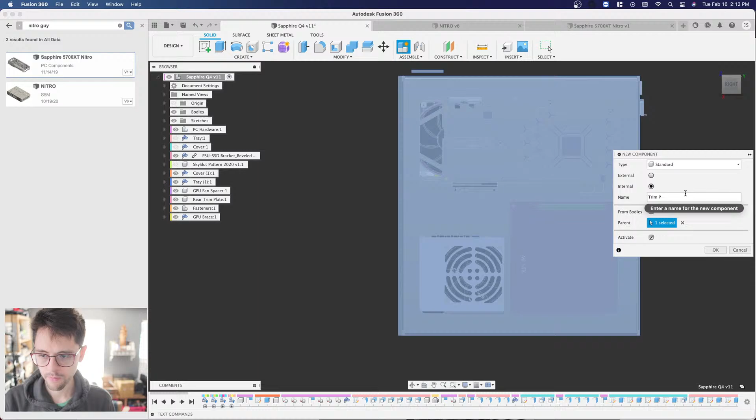We're going to call this trim parts. And I'm going to move the GPU brace into it. I'm going to move the fan spacer, the rear trim plate, and fasteners into it, and this bracket into it.

And I'm going to rename this cover working and tray working, and I'm going to name this T. And this C, so I don't click it as often.

And I'm going to create a new component in trim parts. And this is going to be the cable shroud.

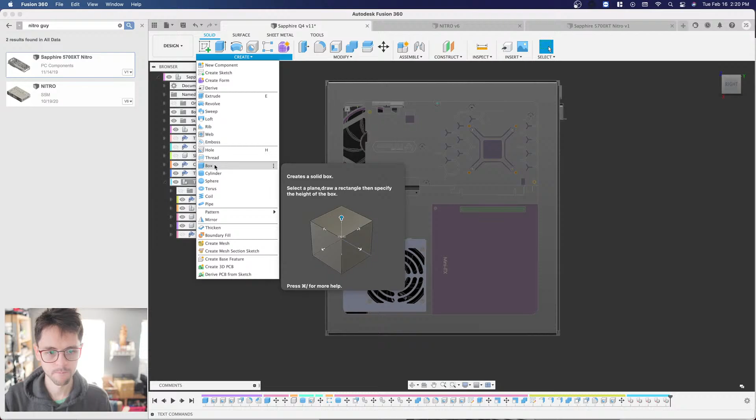No, it needs to be up higher. No!

This is going to work. Alright, hide everything else. Tray, all this stuff. This, and this.

The exhaust of the card is going to be great because it's going to come up here from the sides, right? That's where the majority is. So it's going to come right up and go through those SkySlots. The intake's going to be great. And from the back side, you're going to see it's going to be fine. The card's going to exhaust beautifully. Good consideration, of course.

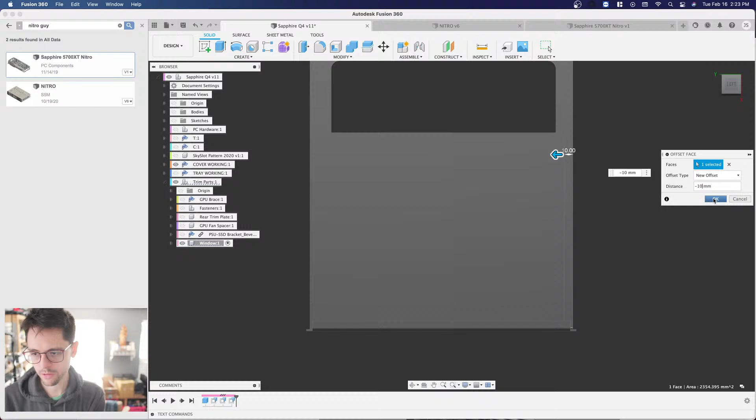I can have... Okay, it's going to bolt from the top there. I think this will clear. I'm just going to use 10 for right now and come back later when I add the screws.

This actually can go all the way to the edge there, but... well, it can't go all the way to the edge. No, it has to at least clear there. We'll say -5. Give it some extra grip on the edge.

And this was going to be... I'm deciding the thickness. Probably it'll be a 5mm thick panel. Let's do 3 to start. -7. I might make it a little thicker. Move this window over. Right there.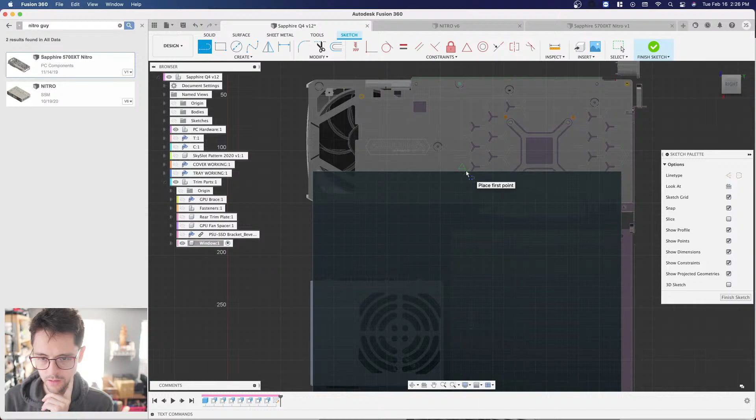And I'm going to make a center rectangle. That's going to be 40 millimeters. That's 20 millimeters thick. Is that going to be high enough for my little... I think so.

Now I'm going to make a line extending out to the edge of my window here. And one right here. And I'm going to... -3.

Okay, now I can work with this with my tray cover over. Oops, not my tray, my cover. I know that I want to move it down a little bit more, so I'm going to do that to start. Just a bit, right?

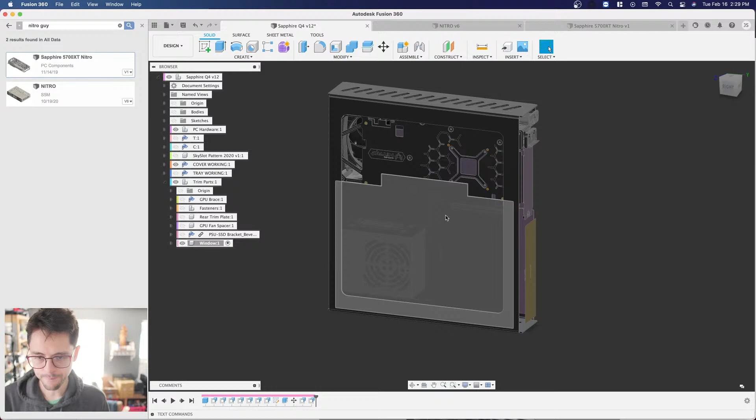Okay. Then I'm going to add some more fillets. I think it'll really come to life. First, I'm going to add my sky slots, though, before I do that. So I'm going to hide everything else.

Hey, Jeremy. Long time no see. Hey, you're even a moderator on the channel. So, perfect.

PC hardware. SkySlot Pattern 2020, baby. Let's add them back in. This is how you put a model in the design for people who are asking later. You just right click on it and click insert into design.

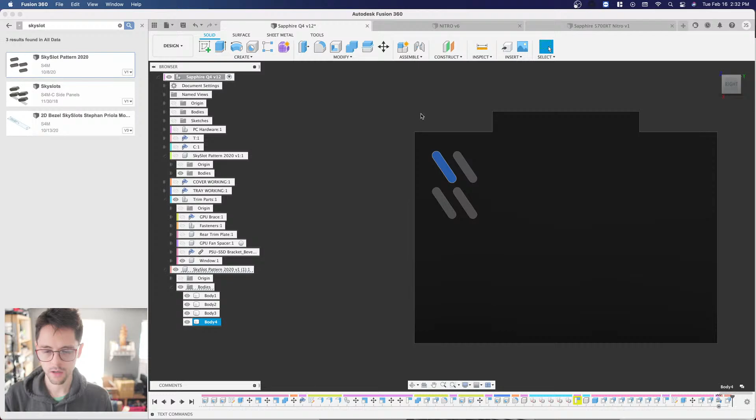Alright, now we make our pattern. We make our pattern by selecting the first body, top one, this one, this one. Alright, and we click Create Pattern, Rectangular Pattern. And we want to go this way to start with. Choose how far I want to go, which is about right.

Ooh, I actually meant to get my tray on there. Okay, that's correct. Good. And now I want to fill it in. So 3 is not going to cut it.

We need like 13. We're going to do 12. 12 this way. And 5.

And now we have an accurate SkySlot pattern that is VESA compatible and everything. Now we don't want the SkySlots going back down through here. Obviously that would look bad, so we're going to try to move everything around a little bit and see what we get. Otherwise we might have to eliminate one row of sky slots.

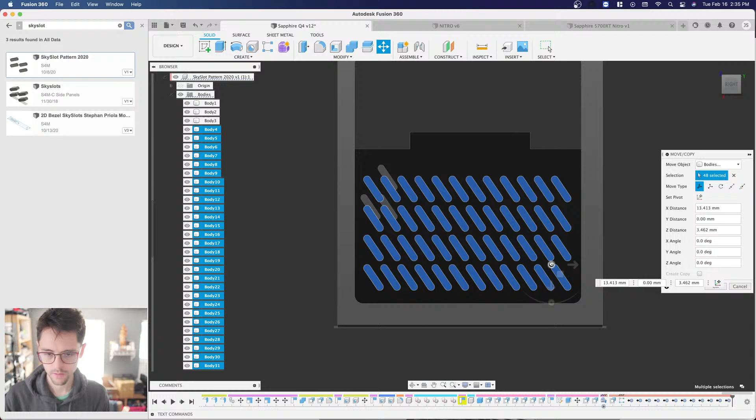Right about there, huh? And we know we don't want... we come back up here and go PC hardware. We know we can get away with going down a little bit more, so let's go down a little bit more, just a little. Well, actually I can't go down more because if I'm looking at it from the top, there'll be a gap. So I'll be happy to keep it like this.

So let's hide everything again and extrude it and make all those sky slots disappear from our very slow model. We want to hide this and we want to hide the PC hardware. Combine, target body, and then we have the fun job of clicking 4, 5, 6. Let's see, 1, 2, 3, 4, 5, 6, 7, 8, 9, 10, 11, 12. 48 sky slots.

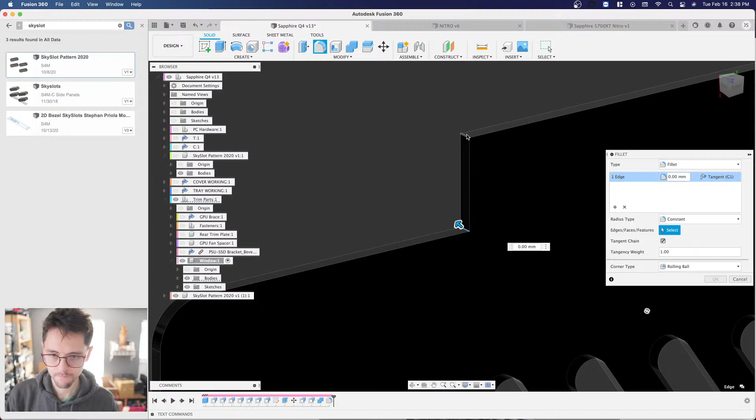Let's add our fillets. First we'll start with the outside ones, which we know are going to be 10. And then the inside ones, we might not keep that so high, but because we do have some space now for the sky slots. But let's see what this is going to look like.

All right, we want to unhide the PC hardware and at least unhide the cover. And we kind of just want to drag... something like that, something smooth that blends nicely, that I can put the name of the PC on, like engraved or cut through.

So now we still have access to seeing the graphics card on the back side, which is important because that's the whole point, right? We still have a cover that's going to be well ventilated for our power supply and our graphics card. We'll be able to see stuff through the sky slots, but that will look kind of cool. They're going to help our brain not pay attention to the wires coming out the SFX power supply. And if I get an SFX-L power supply, a lot of that's going to be covered even more by the acrylic up here. So I think that's going to be a reasonable compromise.

What do you guys think?

Meanwhile, Eric Peterson asks, will the S4T be VESA compatible? And yes, it will be, because it uses the official sky slot pattern. So it will absolutely be VESA compatible.

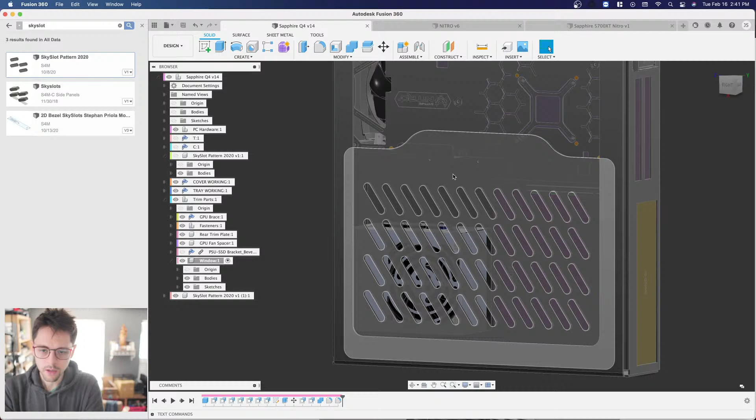I'm not going to use fasteners to fasten this window because I want it to be clean. So there's one of two things I'll do. I'll either add 2 lines here in the sketch and then CNC it so it sits flush with the side panel, if I have time to CNC it—I'm really pressed for time on this build. Or I can laser cut it exactly as is now, and I'll use some mounting tape on the back side. That way there'll be no screws visible.

What's left is the front bezel, which I might wait for last to figure out. And I want to do a stand. That's important. I want to do a stand.

And I still can, if I wanted to, change the orientation of the computer case. Of course, I'd have to flip the Nitro Guy logo around, but that's not a big problem. That has the benefit of the power cable being at the bottom, which I like. Also makes the graphics card's logo the right side up. The downside is that it will be somewhat top heavy, and the graphics card I really want to vent really well because the graphics card runs very hot. It's a 5700 XT hot graphics card, and even with a stand, I'd prefer if it was venting straight up, not hitting a table and bouncing out. So there's those considerations.

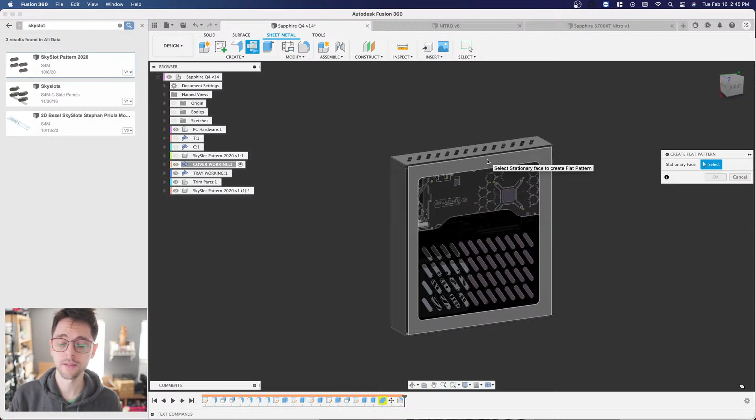Sorry, I lost my train of thought. Select my part, go to sheet metal, create flat pattern, click on a face of my part, hit OK, and like magic, it squishes it down into a 2D profile.

Now, you might want to do a sketch first if you have countersinking holes and you want to choose the right side, because you want to obviously choose the side with the smaller hole rather than the bigger hole, otherwise it won't make a correct sketch. And to do that, all you would do is - let me hit cancel - you click create sketch, and then you click on your part, like so, and then you just close out.

It's done, right? So then you go to your sketches and you right click on the sketch, and then you click save as DXF. But let's try to do it the other way first.

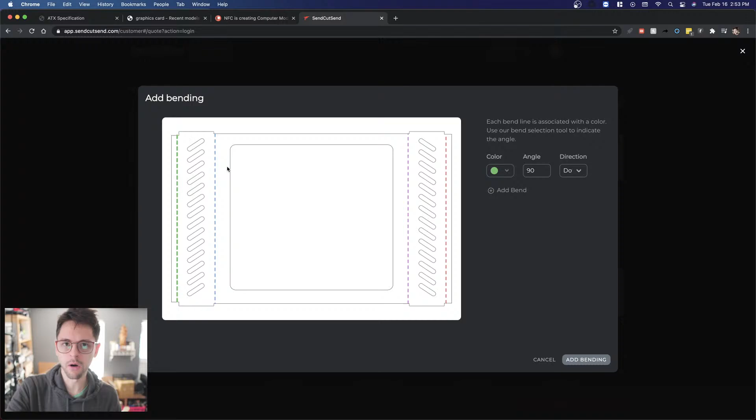Now, something I noticed is there was still one more bug. Even though I clicked all these and selected down, in the back end it didn't do that for me. Maybe they have it fixed by now, but luckily the guys at SendCutSend are awesome, and they'll contact you and say, hey, which do you want these bend lines to be? And then you could just mark on a piece of paper what you want them to be, so it's not a big deal.

And look, even though this was 4 bends, the computer is still saying it's $29, even though they said that 3 bends was the maximum. So that's a fantastic price for not having to do anything yourself. And SendCutSend has a press brake, so you'll get nice, super crisp lines.

And our subtotal, $74 for this homemade part. I mean, that's amazing. This is...

If you were going to buy this aluminum from, like, onlinemetals.com, you can go look up the prices, but I think the metal would be about $50, and then the shipping would be even more than that. So you'd actually end up spending more money just buying the material in small amounts to do it yourself.

Now, of course, if you have access to a metal yard, you can go get a big giant sheet of metal, 4x8, for $300, $400, something like that, and then make a bunch of cases out of it. But then it's really big and you have to cut it down. So I think it's just amazing that you can get your part actually done and bent for less money than the material.

Now, something to keep in mind too, is that if I put cutouts all the way across here, it would be unbelievably expensive. So I'm going to show you an example if I have one. Let's look at this guy.